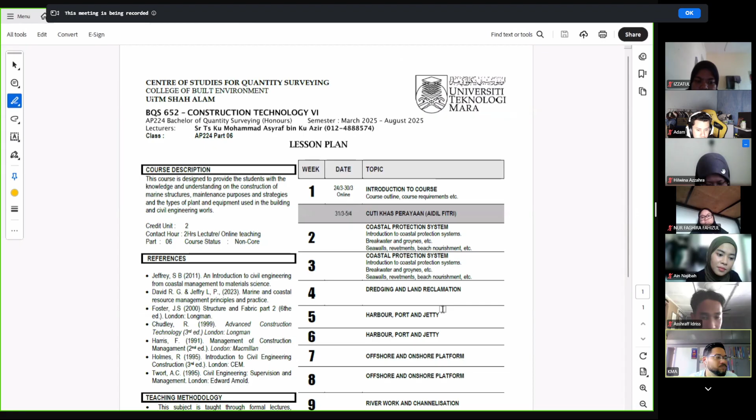Okay, alright. So for this week, which is week 8, week 9, okay. Macam mana nak buka? Okay, alright. Week 9, awak nampak ke saya punya ni? Do you see the lesson plan? Nampak. Okay, so sekarang ni if you look over here, kita recap balik kan. Bukan dah lama. Last week kita buat kelas tak? Tak ada kan? And then this week, because we are ahead. Okay, for your information, because we are ahead. What means that we are ahead?

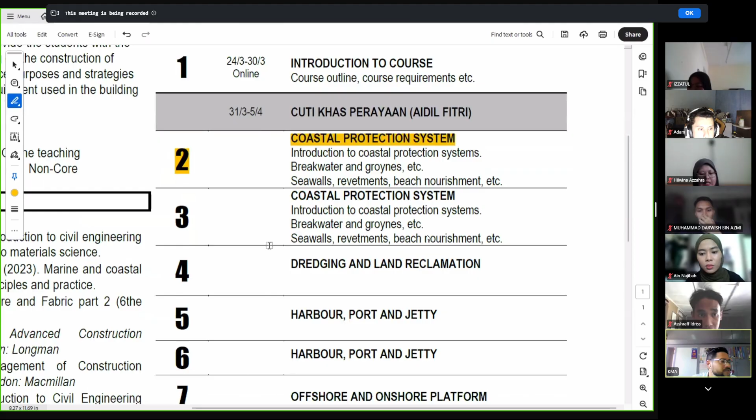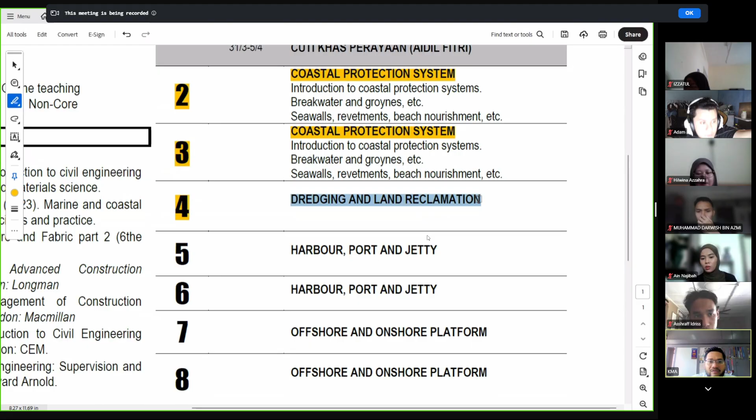Okay, if you look over here, our lesson plan, week 2, coastal protection. This one I cover on our second week. Okay, week 3 also coastal protections. Week 4, dredging land reclamations, including river, kan? Dredging land reclamation and river. And then week 5 and week 6 for harbour, port and jetty. Week 7, week 8 offshore, onshore. We already done cover on that.

So what exactly is maintenance? Simply put, it's all the work done to keep or restore a building or its component to a good and safe condition so that it can perform the way it's supposed to. According to BS 3811 standard, maintenance means returning something to a condition where it can function properly.

This can include small things like changing a light bulb or big things like repairing part of a roof. It's not just about fixing something when it breaks, but also preventing it from breaking in the first place.

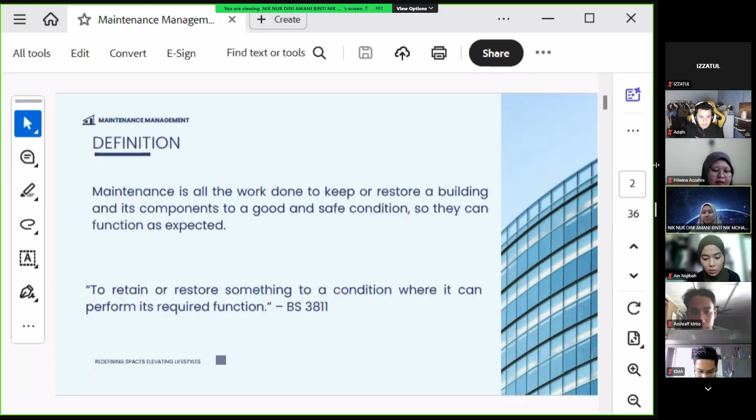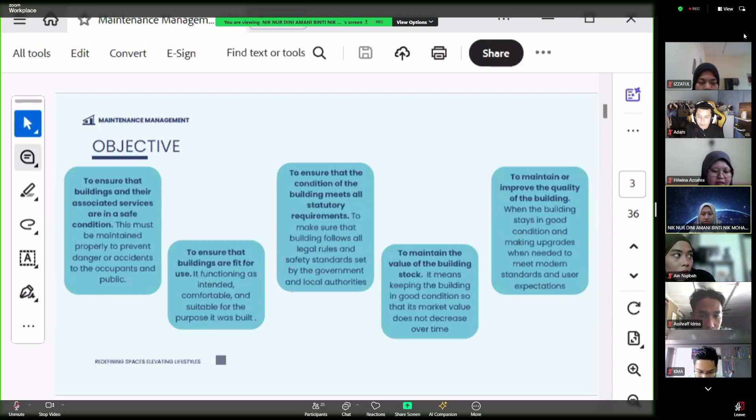For the objective, the first one is to ensure the building and their associated service are in a safe condition. This must be maintained properly to prevent danger or accident to occupant and public. If we ignore a small issue, they can lead to serious accident or injuries.

The second one is to ensure the building are fit for use. It function as intended, comfortable and suitable for the purpose it was built. For example, a building with broken air conditioning or faulty plumbing is very uncomfortable for users.

The third one is to ensure that the condition of the building meets all statutory requirements, to make sure that building follows all legal rules and safety standards set by government and local authorities. Next, to maintain the value of the building stocks. It means keeping the building in good condition so that its market value does not decrease over time.

The last one is to maintain or improve the quality of the building when the building stay in good condition and making upgrade when needed to meet modern standard and users expectation.

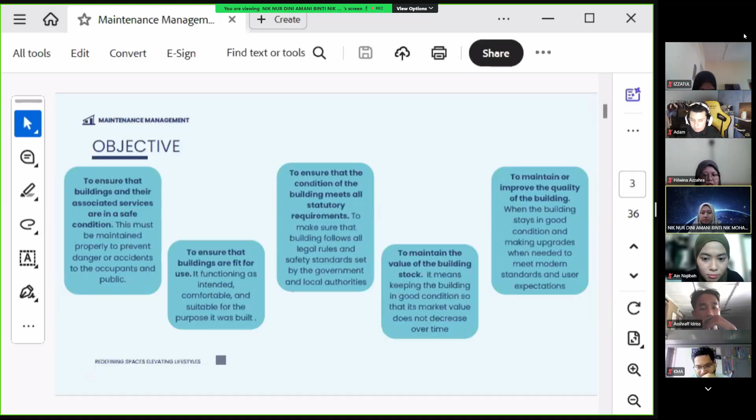Next is cause of defect. The first one is it can start from the design stage, which is lack of design. Poor or incomplete building design can cause structural problems with the water leakage and safety issues. Next, details of workmanship. If the construction work is done poorly or carelessly, it can lead to crack, loose fittings, or uneven surface. Next is wear and tear.

Normal damage over time due to the frequent use or aging materials, which is a normal over time, and natural causes like soil movement, which can affect the foundation. Next is soil movement. Shifting ground or weak soil can crack walls or damage foundations. Next, vandalism. Deliberate damage by people such as breaking door, graffiti, or damaging fittings.

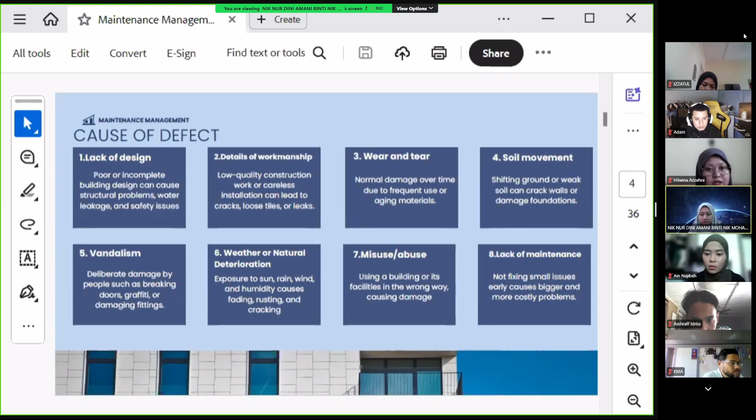Next is weather or natural deterioration. Exposure to sun, rain, wind, and humidity can cause fading, rusting, and cracking. Next is misuse. Using a building or its facility in wrong way, causing damage. The last one is lack of maintenance. Not fixing small issue early cause bigger and more costly problem.

This is an example defect at house. The first one is roof. The roof is missing or broken tiles and exposed timber framing. This type of defect can lead to water ingress, damaging the internal structure. Preventive maintenance such as regular roof inspections and replacing damaged tiles can avoid costly repairs.

The next is wall. The wall cracks and surface deterioration could stem from structural movement, settlement, or material aging. Must be monitored under condition-based maintenance routine to identify whether it's cosmetic or structural.

The next is finishing. The plaster around the window and surface were worn out. Typically, a result of weather exposure or poor initial workmanship. It falls under cyclical maintenance, planned tasks like repainting or plaster repair.

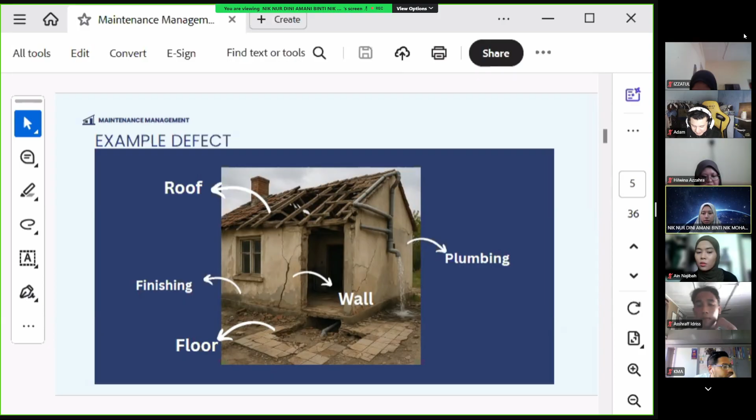For the agent of defect, there are also certain agents or factors that speed up the damage. The first one is dampness, caused by water seeping through walls, floor, or ceiling. For example, when water seeps into wall, it can cause mold or even rot to the structure.

The second one is biological agent. It includes mold, fungi, algae, moss, and termites, that damage materials over time. The next is heat. High temperature can also expand material, causing cracks or warping. Next, weather. For example, rain, wind, humidity, and UV rays accelerate wear and damage external surface.

The next, air pollution. Chemicals, gases, and dust in the air can corrode surface and reduce material lifespan. The next is fire. Can cause serious damage to the structure, finishes, and building system in a building. The last one is human. Whether through carelessness or intentional vandalism can all cause harm to the building.

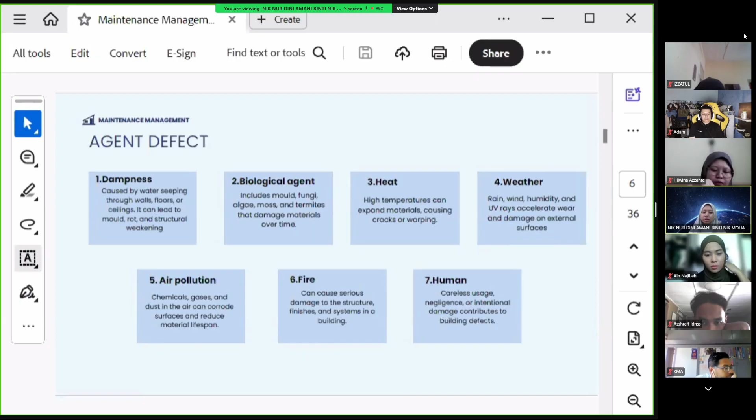Now let's understand two important ideas behind maintenance. The first one is predictable problems. These are issues we expect to happen over time, like paint fading or roof tiles wearing out. Since we know they will happen, we can plan ahead. That is predictable.

The second one is avoidable. These are things that could have been prevented if small issues were fixed. For example, if a small crack is ignored, it might grow into a structural failure. So good maintenance means acting before things get worse, not just reacting after damage is done.

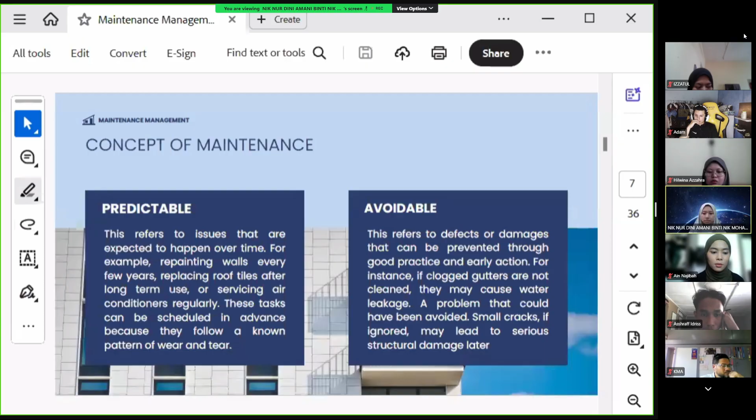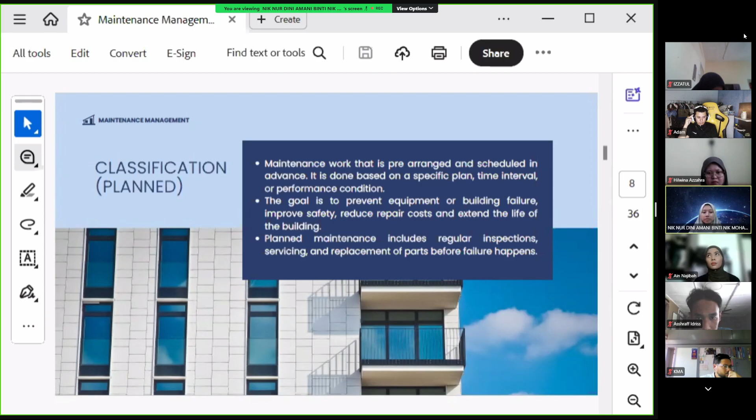For the classification, we can divide maintenance into two main types: planned and unplanned. Planned maintenance is work that is scheduled in advance. It is done regularly based on time or equipment conditions. Why do we plan maintenance? To avoid breakdowns, reduce risk, improve safety, and extend the lifespan of the building or equipment. This includes things like monthly inspections, filter replacement, or scheduled repairs, all done before a failure happens.

Okay, planned maintenance can be broken down further into two types. The first one is corrective maintenance. This happens after a problem is discovered. For example, if a pipe is leaking, we fix it to restore normal function. The second one is preventive maintenance. This is done before something breaks. It's like getting your car serviced regularly so it doesn't break down on the highway. Preventive maintenance saves time and money in the long run because it helps avoid emergency repairs.

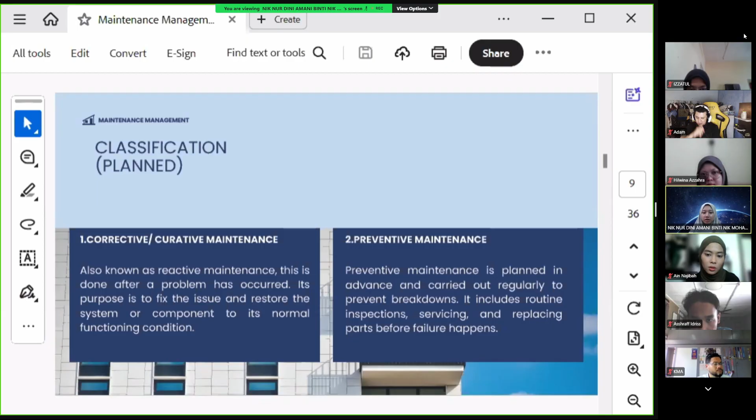Next, preventive maintenance can also be divided into two strategies. The first is routine or schedule-based maintenance. These are regular tasks done every day, week, or month, no matter what. For example, checking emergency lights or cleaning air filters.

The second is condition-based maintenance. This is more advanced. We use inspection or monitoring tools to check the real condition of equipment. If something is starting to wear out, then we do the maintenance. These methods are efficient because we don't waste time or money doing unnecessary repairs.

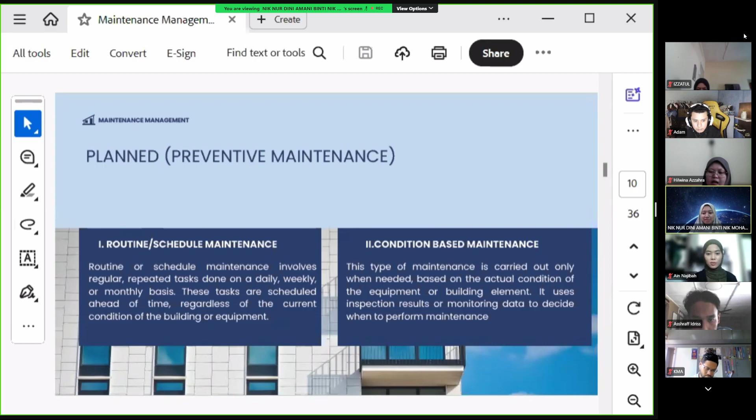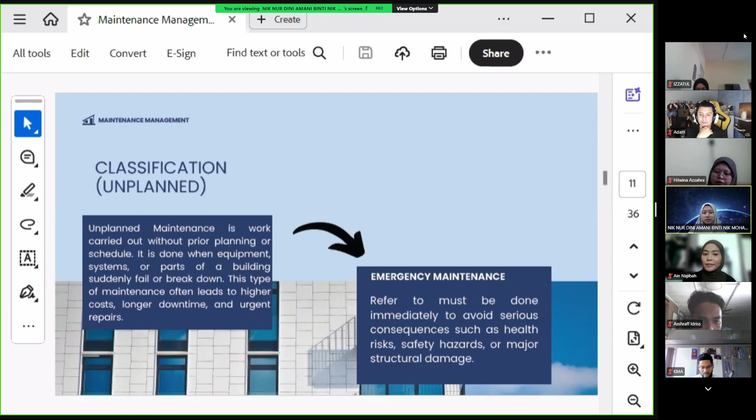Okay, now let's talk about unplanned maintenance. This is when something breaks down unexpectedly and we need to fix it immediately. Sometimes this is called emergency maintenance. For example, when a major pipe bursts or the power system fails. This type of maintenance is usually more expensive and more stressful because we didn't plan for it. It can also lead to longer downtime or safety risks if not handled quickly.

The last one is types of maintenance. Servicing: these are regular, simple tasks to keep everything running well, for example, checking air conditioning or testing fire alarms. Second is rectification. This means fixing small problems early, like sealing cracks or tightening loose door hinges. The third is replacement. When something is beyond repair, we replace it completely, for example, broken tiles or faulty switches.

The last one is renovation. This involves upgrading or modernizing parts of the building to improve appearance, functionality, or value.

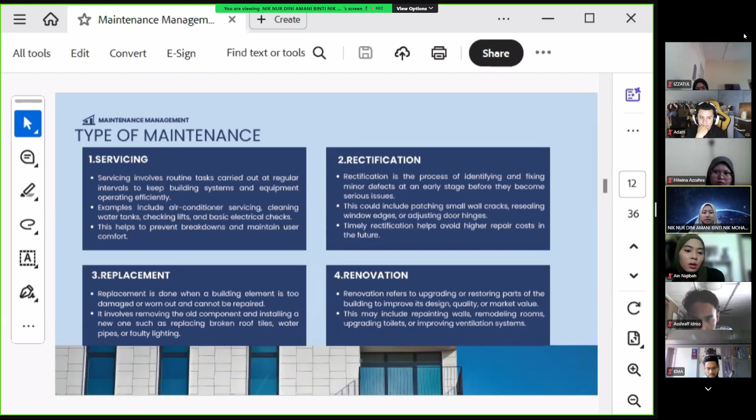Okay, I will pass to Ain. Hi, Assalamualaikum. My name is Nur Ain Najibah.

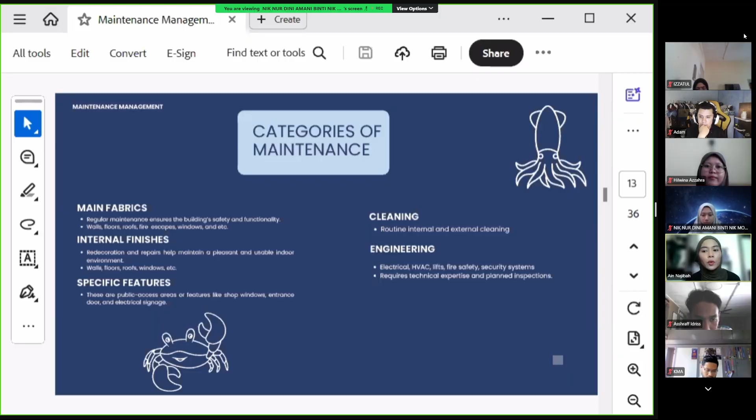Okay, my slide is about categories of maintenance. First, we have public access areas and specific features such as shop windows, entrance doors, and electrical signage. These elements are often the first thing people notice, so it is important they are clean, functional, and well maintained. Routine cleaning, both inside and outside of the building, plays a main role. Regular cleaning not only improves appearance, but also supports hygiene and safety.

Next, the main fabric of the building, including walls, floors, roof, and windows. These structural components require ongoing inspection, timely repairs, and redecoration to ensure they stay in good condition. Finishes like paint, plaster, tiling, and flooring need regular maintenance; redecoration and minor repairs help maintain a comfortable and attractive indoor environment

for all occupants. Lastly, we have engineering services such as electrical systems, HVAC, and security systems. These systems are crucial for functionality and safety. Their maintenance requires specialist knowledge and should follow a planned inspection schedule. Okay, next, Dini.

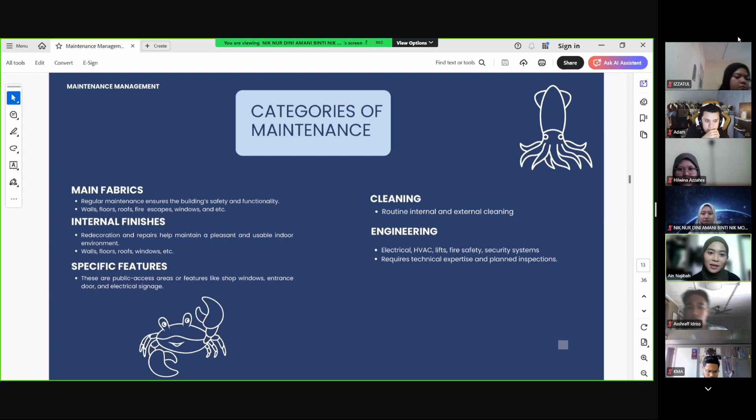Okay, maintenance activities in buildings can generally be divided into two categories based on the scale of the work, which is large scale and small scale. Large scale maintenance work involves tasks that require a high level of skill and experience. These jobs are typically carried out entirely by skilled workers, for example, major repairs or replacement of building elements and services.

On the other hand, small-scale maintenance work may not require full-time skilled workers. In this case, part of the job is handled by the skilled workers, while other jobs are handled by external contractors, also known as a contract service. This approach is cost-effective and flexible, especially for routine and minor repairs.

What is maintenance cost? Maintenance cost includes everything spent to preserve the building's functionality, appearance, and safety. These costs are divided into two categories, which is direct and indirect. Direct maintenance costs involve the actual expenses needed to carry out maintenance activities. These include cost of labor, cost of material, and cost of equipment. Indirect maintenance costs are less obvious but equally important; these include cost of administration, cost of overhead, and cost of penalty.

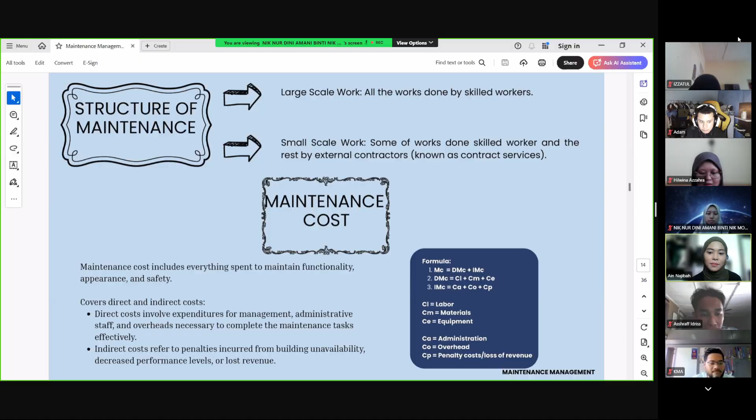Next, okay. When it comes to budgets for building maintenance, there are different methods used to calculate and manage costs. The first one is the fixed periodic cost method, the most widely used in maintenance contracts. Under this method, the contractor is paid a predetermined fixed fee, usually set on a monthly, quarterly, or annual basis, regardless of how much work is actually done during that period.

This method comes in two forms, which is uncontrolled input and controlled input. For uncontrolled input, the contractor delivers the required service for a fixed cost, but there is no tracking of how much labor, material, and equipment is used. This approach offers simplicity but limits transparency. With controlled input, the contractor is still paid a fixed amount, but the contract defines a minimum level of input, such as worker hours. This provides more control and ensures a basic service standard.

The second one is a management fee. This method is used when the client wants to maintain control over the workforce and resources. Here, the client supplies all labor, material, tools, and equipment, while the contractor provides management services. These services include planning and scheduling of work, supervising the client's maintenance staff, quality control, and performance monitoring. As you can see, there are a few advantages and disadvantages for management fees.

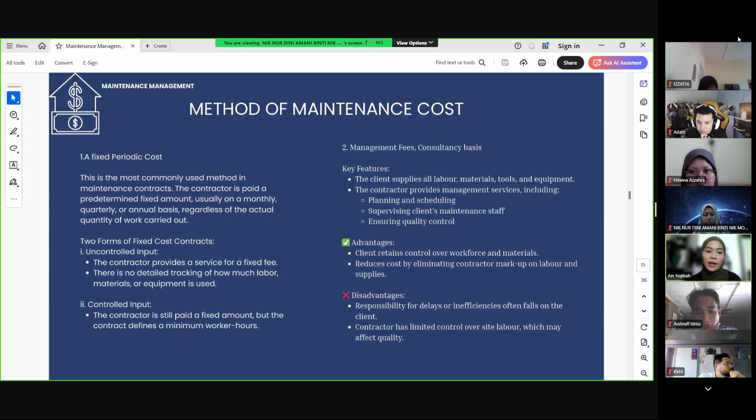Okay, the third one is cost plus percentage profit basis. In this method, the contractor is reimbursed for all contract costs incurred, such as labor, material, and equipment. On top of this cost, the contractor receives a percentage-based profit, which is calculated there. As you can see, there are a few advantages and disadvantages for cost plus percentage profit basis.

Okay, lastly, cost plus fixed fee basis. This approach is similar to the cost plus model, but instead of earning a percentage profit, the contractor is paid a fixed management fee on top of the actual cost incurred. Okay.

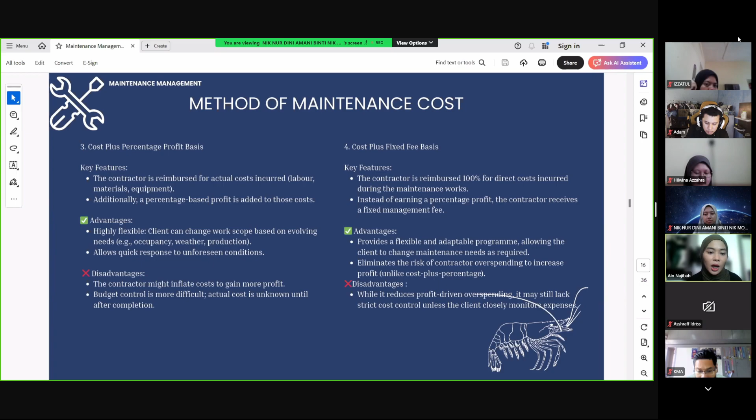Okay. Using contract services for building maintenance offers several key benefits that can improve efficiency and reduce the client's workload. The first one is reduced administrative burden. Then, access to skilled workers, higher efficiency and quality, quick emergency response, scalability without hiring, and no capital investment in equipment, as contractors bring their own specialized tools and machinery, so clients don't have to invest in expensive equipment or worry about storage and maintenance.

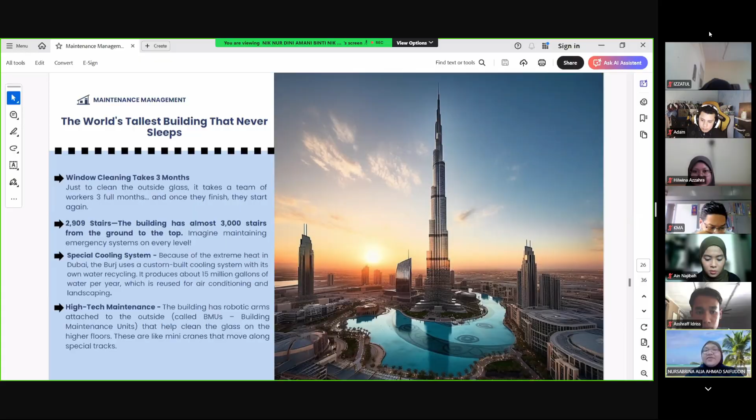Next is high technology maintenance. The building has robotic arms attached to the outside called BMUs, building maintenance units, that help clean the glass of the higher floors. These are like mini cranes and move along special tracks. Thank you, next I will give it to Hilwina.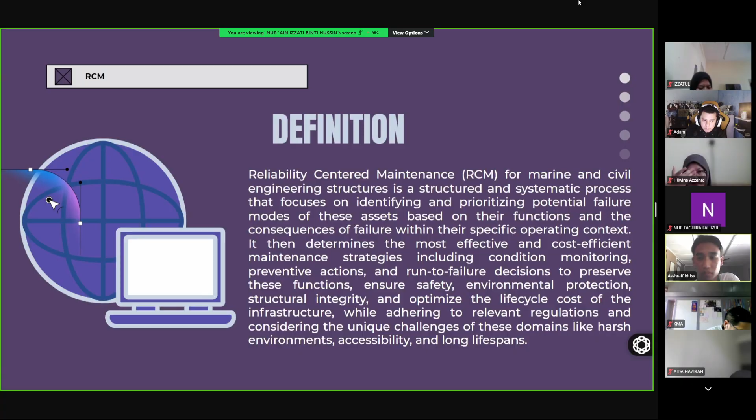Okay, now the purpose of RCM. First, improve structural reliability. The RCM focuses on maintaining the functions of critical equipment, minimizing unplanned downtime, and maximizing asset availability for production to ensure that the structure can consistently perform its intended functions. The second, lower maintenance costs.

RCM helps to reduce costs by identifying and eliminating unnecessary maintenance activities, thereby reducing labor and material costs. Additionally, by preventing failures, RCM can avoid costly repairs and production losses. Lastly, RCM can increase efficiency and safety. By maintaining structural reliability, RCM contributes to enhanced workplace safety and the quality of products and services.

RCM is a fundamental methodology for ensuring the reliability, availability, and operational efficiency of industrial assets. By adopting a strategy based on knowledge, risk assessment, and advanced technologies, companies can maximize equipment performance and gain a competitive edge in the market.

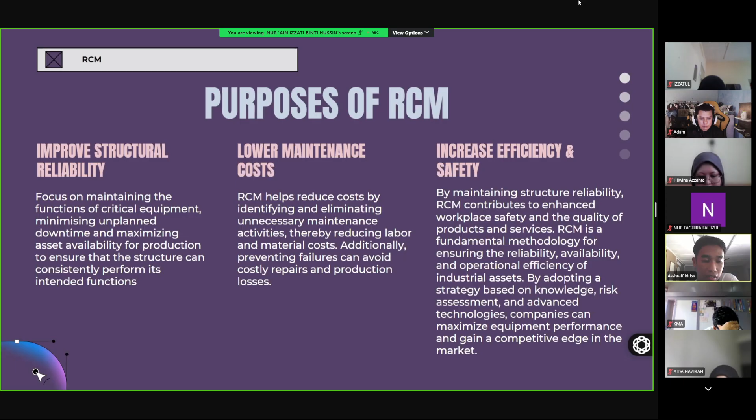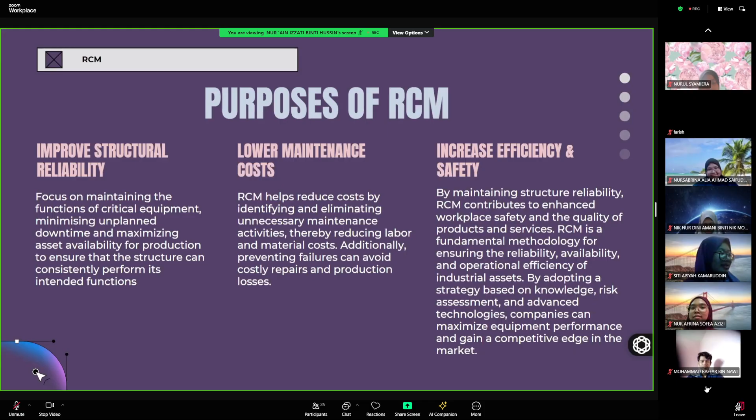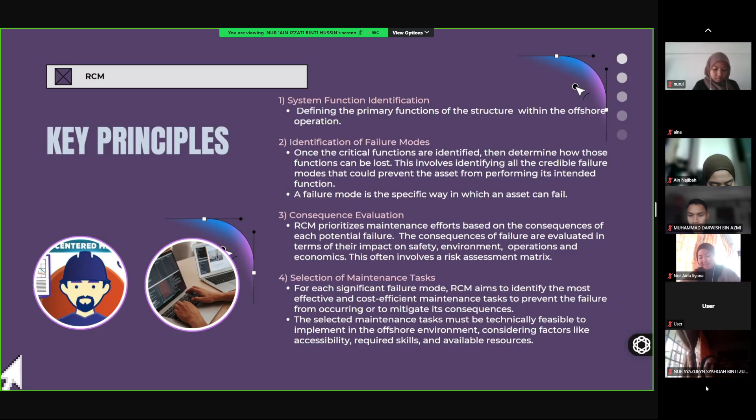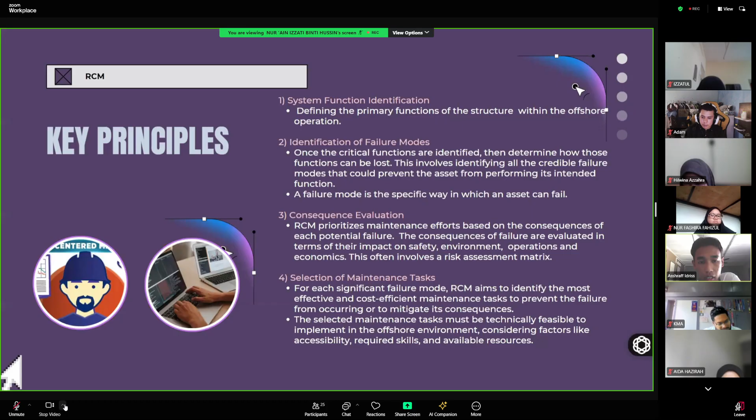And now I will talk about the key principle of RCM. The key principle of RCM includes system functions identification, which is defining the primary function of the structure within the offshore operations. Instead of maintaining equipment in its original state, the primary goal is to preserve the functions that the equipment is designed to perform within its specific operating context. This principle emphasizes understanding what each asset does rather than just what it is. Maintenance efforts are then directed towards ensuring these functions are maintained.

For the operating context, the same equipment in different contexts might have different critical functions and therefore require different maintenance strategies. For an offshore platform, the corrosive marine environment and continuous operation are key aspects of the operating context.

Secondly, identification of failure modes. Once the critical functions are identified, then determine how those functions can be lost. This involves identifying all the credible failure modes that could prevent the asset from performing its intended functions. The failure mode is the specific way in which a structure can fail, for example, bearing failure, seal leakage, motor winding burnout. A tool, failure mode and effect analysis or failure modes, effects and criticality analysis, is often employed to systematically identify these potential failure modes.

Consequence evaluation. RCM prioritizes maintenance efforts based on the consequence of each potential failure. The consequences of failure are evaluated in terms of their impact on safety, environment, operations, and economics. This often involves a risk assessment matrix.

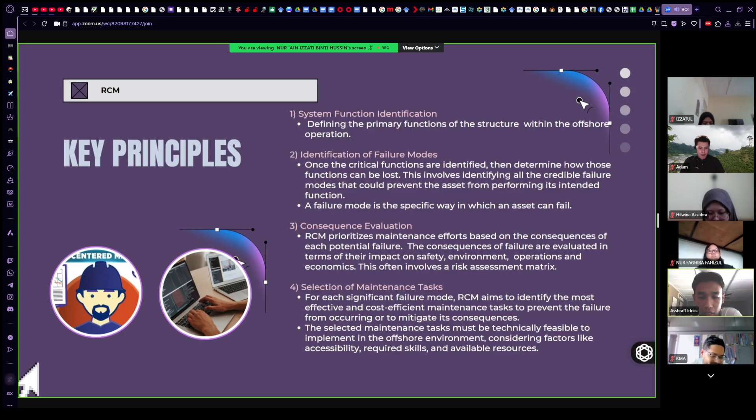The last, selection of maintenance tasks. For each significant failure mode, RCM aims to identify the most effective and cost-efficient maintenance tasks to prevent the failure from occurring or to mitigate its consequence. The selected maintenance tasks must be technically feasible to implement in the offshore environment, considering factors like accessibility, required skill, and available resources. I will pass to

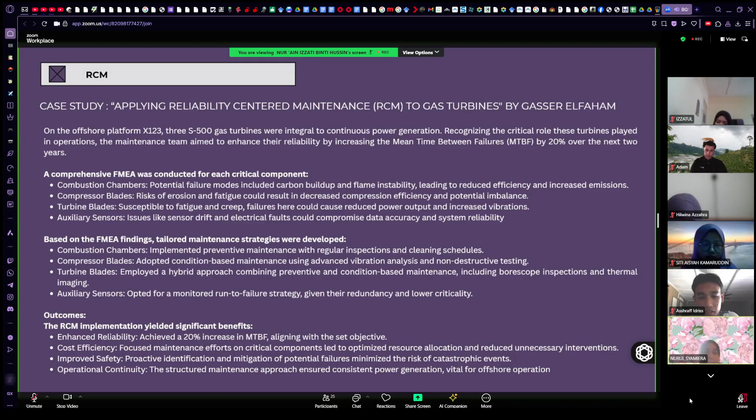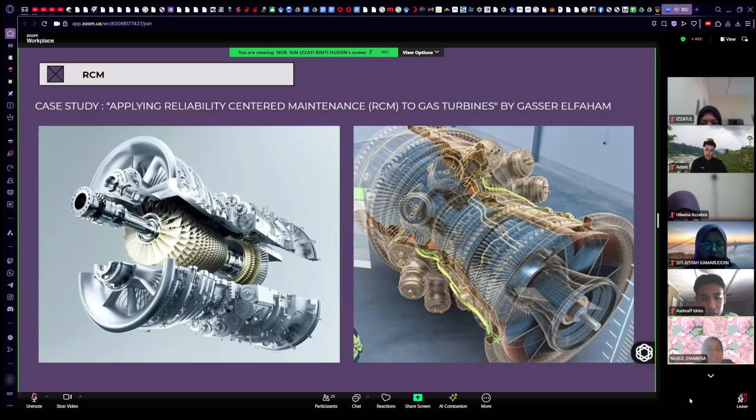For the operational context, this means adjusting the maintenance plan to reflect how the asset is used. So we assess things like duty cycles, is the equipment used continuously or intermittently, the operating conditions, are there contaminants, high pressure or extreme temperatures, and external factors like location and weather. We can also customize the maintenance based on real-world usage trends, equipment history and age, and the specific performance requirements. This is important because even identical equipment may need different maintenance strategies depending on how and where it is operated. Next.

Okay, for the maintenance planning. For the task development, the main goal here is to define the right type of maintenance for each failure mode and asset. This is critical to ensure reliability and efficiency. We start by selecting the type of maintenance. Firstly, predictive maintenance is condition-based, using vibration, temperature, or oil analysis to monitor equipment health. For example, replacing a motor when bearing vibration starts to increase.

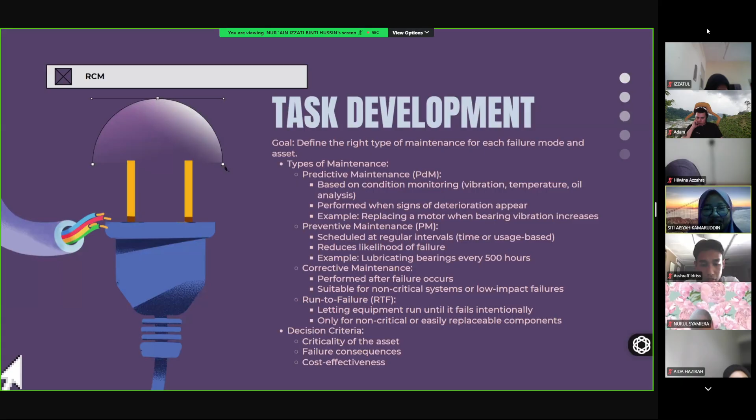Next, preventive maintenance is time or usage based. For instance, lubricating bearings every 500 hours to reduce the likelihood of failure. Next, corrective maintenance is used after a failure, but it's typically reserved for non-critical and low-impact systems. And lastly, run to failure is a deliberate choice to let the equipment run until failure, suitable only for non-critical or easily replaceable items. Each decision is based on three criteria: the criticality of the asset, the consequence of failure, and the cost effectiveness of the chosen strategy. Okay, next.

For the resources required, the goal here is to ensure all necessary inputs for task execution are identified and available. This includes manpower such as skilled technicians and contractors, materials and tools such as spare parts and calibration gear, and accurate budget estimation, factoring labor, parts, and downtime. The output is a bill of materials and task-level resource allocation.

On the right, we have documentation, which ensures we maintain a structured record of our maintenance strategy. It starts with defining the task type, triggers, and frequency, and links them to specific failure modes. Next, the risk assessment addresses the operational and safety risks related to both failure scenarios and the maintenance itself. We also consider compliance with standards like ISO 55000 and OSHA, along with manufacturer guidelines and internal procedures. Lastly, all maintenance plans should be stored in the CMMS and made easily accessible for planners, technicians, and auditors. I will pass to Ain.

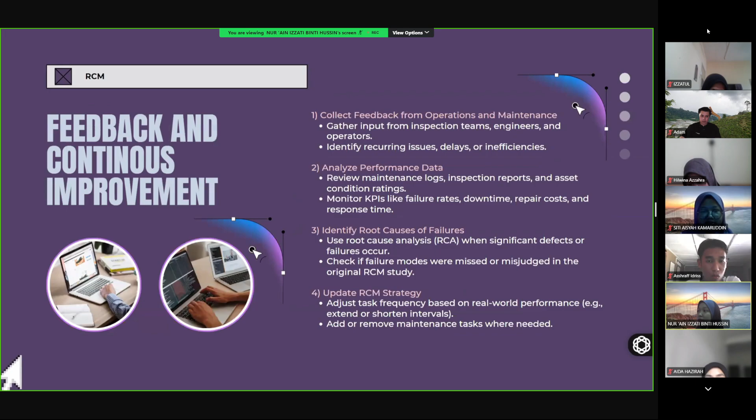Okay, next, execution and control. We start by planning the task based on the RCM strategy: schedule inspections, cleanings, repairs, and replacements according to how critical each component is. A clear maintenance calendar is prepared and responsibilities are assigned. For resource allocation, make sure all necessary tools, materials, and skilled personnel are available. This includes things like coatings, testing equipment, divers, and structural engineers.

Third, execution of tasks. Tasks are carried out according to plan. Teams follow standard procedures and use checklists. For hard-to-reach areas like underwater components, use divers or remotely operated vehicles. All actions are recorded. And lastly, monitoring and data collection. While working, collect important data such as measurements, images, and environmental conditions. This helps track the condition of the structure over time and support future maintenance planning.

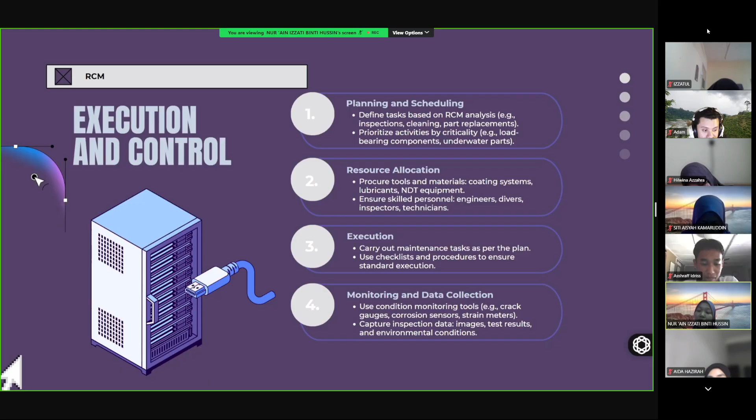Lastly, feedback and continuous improvement. Collect feedback from operations and maintenance. Gather input from inspection teams, engineers, and operators. Identify recurring issues, delays, or inefficiency regarding the structure. Second, analyze performance data. Review maintenance logs. Oh, sorry. For feedback and continuous improvement, collect feedback from operations and maintenance.

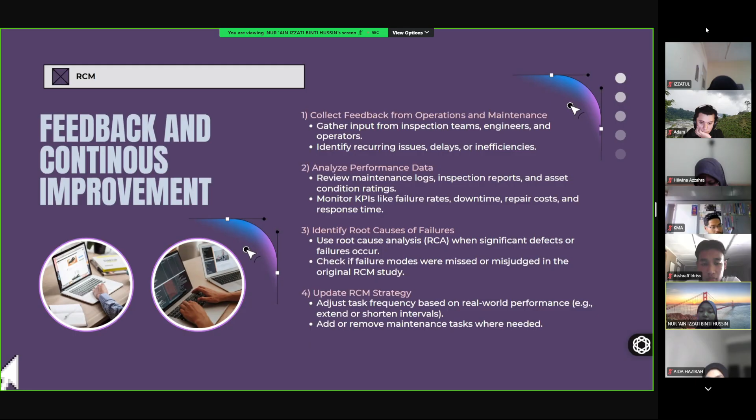Third, identify root causes of failures. Use root cause analysis (RCA) when significant defects or failures occur. Check if failure modes were missed or misjudged in the original RCM study. And lastly, update RCM strategy. Adjust task frequency based on real-world performance, for example, extend or shorten intervals. Add or remove maintenance tasks where needed. I will pass back to Syamiera.

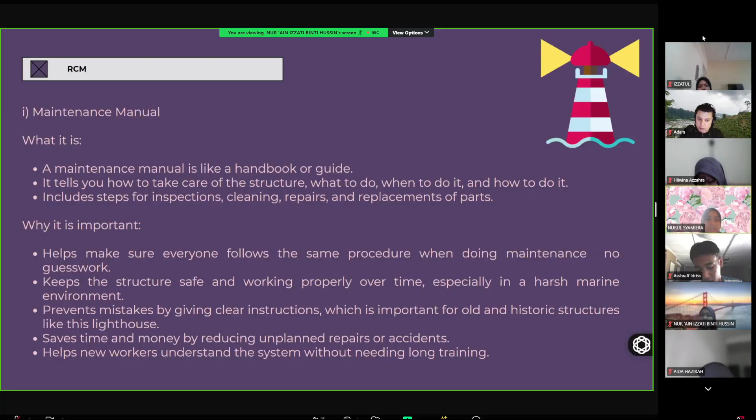Next. Okay, so for the maintenance record system, it is a system, digital or on paper, that keeps track of all maintenance work done. It records things like what was fixed, when it was fixed, who did it, and what parts were used.

So why is it important? Because it helps to know the history of maintenance, so you can see what has been done and what has not. It is useful to plan future maintenance. If there is a problem, it is easier to trace the cause by looking at past records. It also keeps the structure in good condition and helps in making decisions. It is also important for budgeting and reporting, especially for public or heritage structures like the lighthouse. Okay, that's all for us.

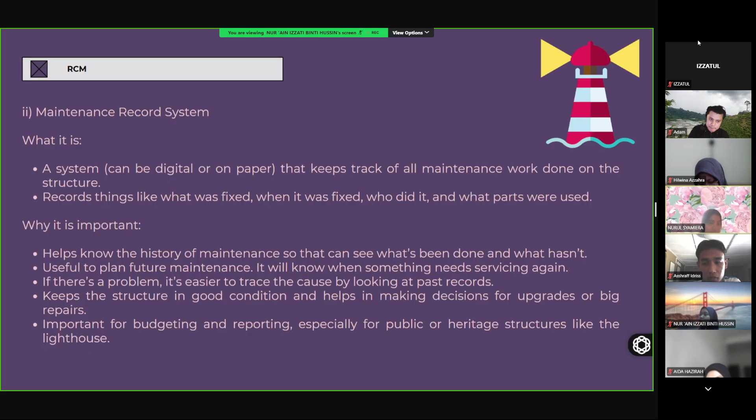Okay, alright. For the previous year questions, this is June 2019, right? So explain the importance to the overall maintenance system for the structure, which is explain the importance or advantage of the maintenance manual and maintenance record. So the answer is: maintenance manual, I will explain. The first one is definition, the second one you explain the importance.

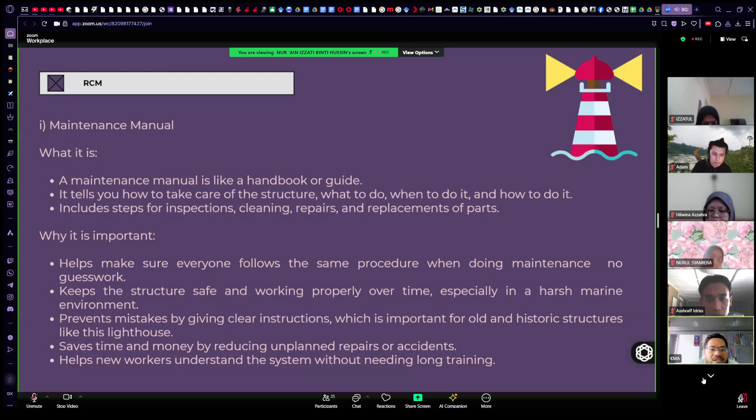Okay. So the next one, this one is maintenance manual. The second one, maintenance record. Same to this one. Okay, record. The first one, what is, you change to definitions and then you need to explain. And the second one, why it is important, you tukar kepada importance or advantages. Barulah you dapat full marks dia. Okay.

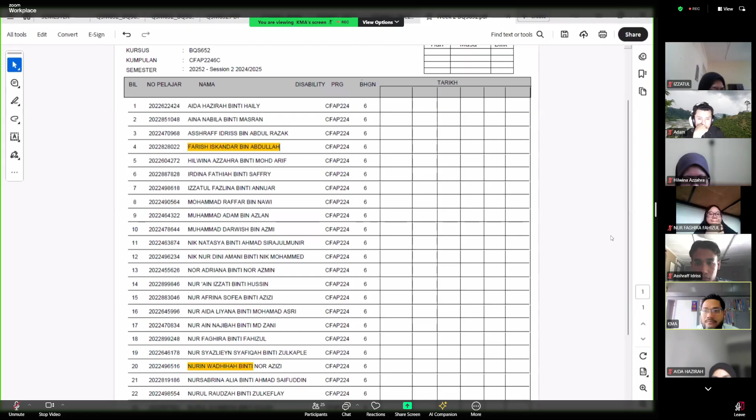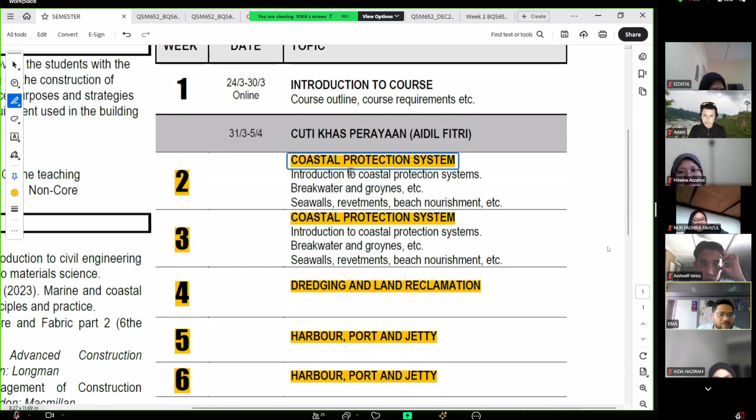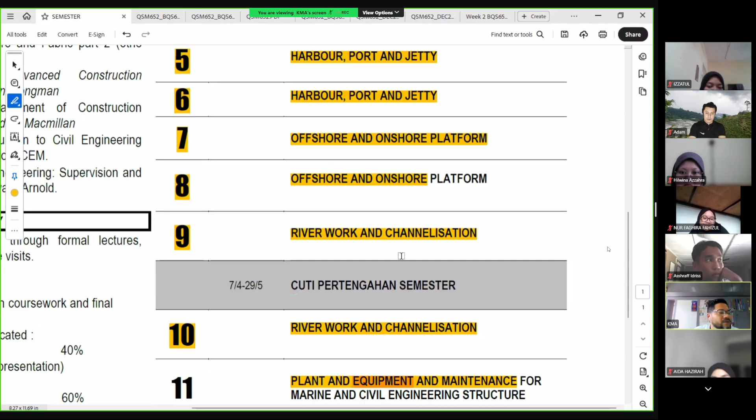Okay, so sekarang ni I'm going to explain dekat awak. By today, we complete all the topics. Kita complete semua topik. Kalau you tengok kat sini, kita dah habis semua topik, which is coastal protection, dredging, land reclamations, harbour, ports and jetty, offshore and onshore platforms, river works and channelizations, and then we have plant equipment maintenance, and then we have reliability centered maintenance

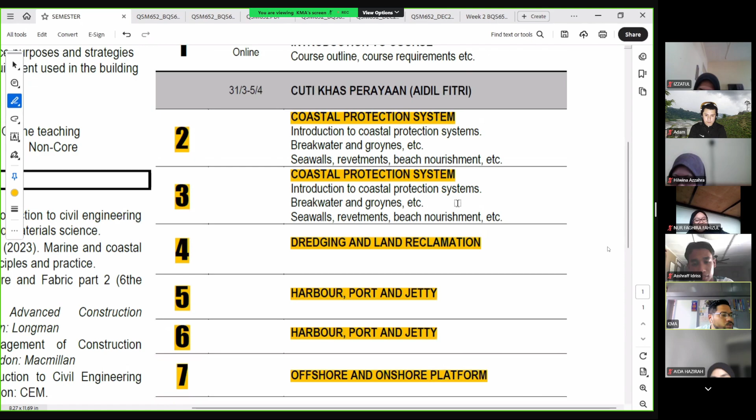for marine structure. So I repeat over here, there are how many topics? Coastal protection 1, 2, 3, 4, 5, 6, 7. There are several main topics that will be asked during final exam nanti. So apa yang kita akan buat minggu depan? For this week, what you need to do is, dengar betul-betul, you are going to have tutorials.

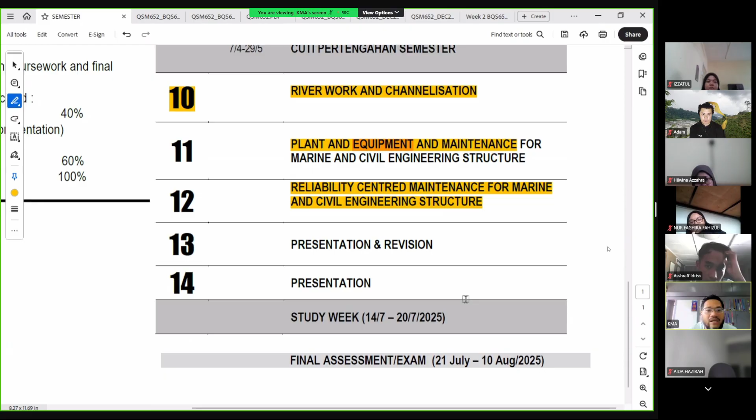So take note, salin. The first one you need to do is QSM 652 December 2019, question 1C, which is discuss the maintenance management system which are carried out in port. Waktu first group present tadi, maintenance system ada berapa? 3. Maintenance manual, maintenance program, maintenance record system. Yang tu awak kena explain.

The next question, awak pergi kepada BQS 652 July 2021, question 1C juga. Discuss the maintenance management system which are to be carried out at the cruise passenger terminal in Westport, Pelabuhan Kelang. So, manual, program dengan record. Dah berapa semester exam questions tanya tentang ni? 2 kali dah dia tanya. Yang ni adalah topik the first group tadi, which is maintenance for plant and equipment.

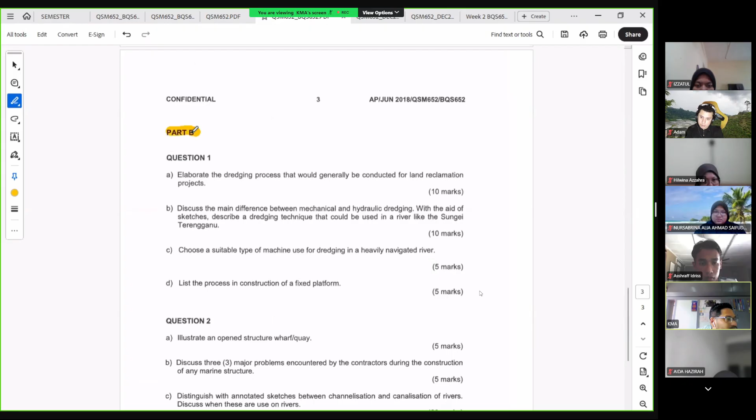We go for QSM 652 June 2018. You need to do part B, question 3. Explain the following: types of crane used for marine project, a typical beach profile identifying beach components, outsource and in-house maintenance, maintenance manual. Awak kena buat part B, question number 3. Okay, next one. December 2019.

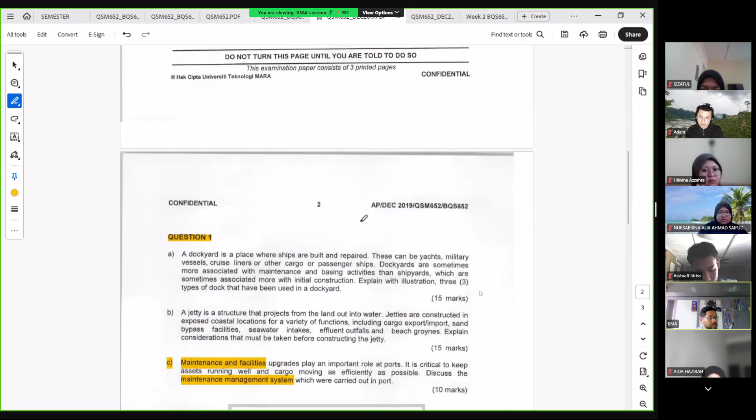Tadi soalan yang sama, maintenance discuss, dah tadi kan? Okay, yang ni benda yang sama. Dah.

Next one is December 18. Ada kan? December 18 ada ke lagi? January 18? Belum. June 18, December 18. Okay, the next one December 2018.

Okay, awak buat questions part B, 1B sahaja. I repeat, part B questions 1B. Explain advantage and disadvantages of 3 methods plant acquisition available and give 3 examples of plant equipment commonly used for marine engineering. Okay, 1B.

The next one, last question. Okay, the last question is awak kena buat soalan yang soalan RCM tadi. Soalan yang kawan awak buat tadi kan, soalan yang group RCM berapa tadi? Berapa, Jun 2019 ke? Betul, buat questions Jun 2019 yang soalan tadi. Cuma kan saya kata, kawan awak explain in point, you need to do in paragraph and give example. Soalan tentang Reliability Centered Maintenance RCM Jun 2019.

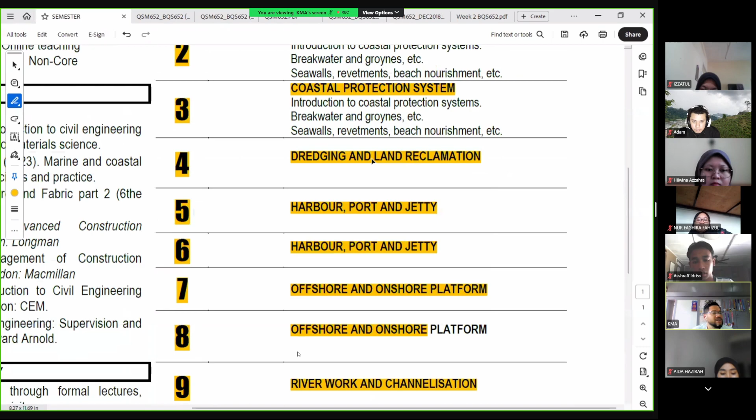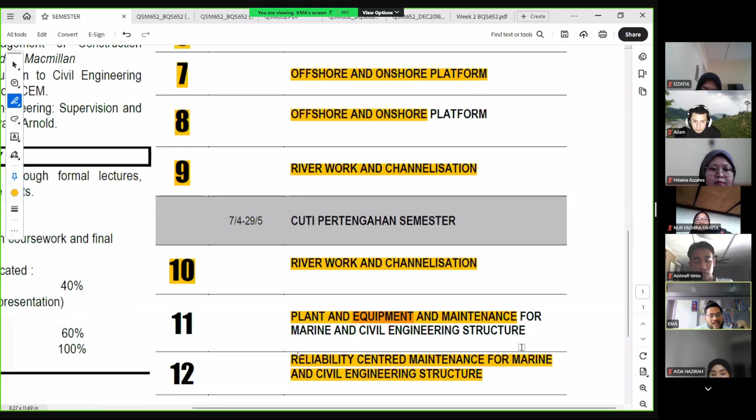Harbour Port and Jetty, dredging, offshore and river. So kalau kita tengok yang ni, nanti group yang tadi present dredging and reclamation, Harbour Port and Jetty, offshore, river - letak tak? River dah ada ke belum? River dah ada. Group yang present tadi, two groups, both group that had present, make sure you letak dalam kita punya Google Drive by today, by tengah hari ni, sebelum tengah hari ni. Okay, letak ni. Nanti kalau tengok your latest tutorial, yang ni semua dah submit lah kalau tengok kat sini.

Okay, nanti awak jadikan this one, saya buat new folder. Yang ni akan jadi tutorial week 9. Submit dalam ni before Sunday 8 of June, 8 Jun. Okay, any questions? Ada soalan?

Minggu depan, sir. Minggu depan kita nak buat apa, sir? Sir, waktu kita masuk kelas balik UiTM tu buat apa? Kita akan buat revision. Saya cakap awal, kita akan buat revision dan saya nak tengok you punya group assignment awak dah hantar ke? Belum kan? Belum lagi. Saya nak tengok progress group assignment awak lah.

Okay, any questions? So I repeat, for the next week, after mid semester break, we will do revisions, and then saya nak tengok your group assignment progress. Tolong bawa. Dalam tempoh within 2 hours kelas kita tu.